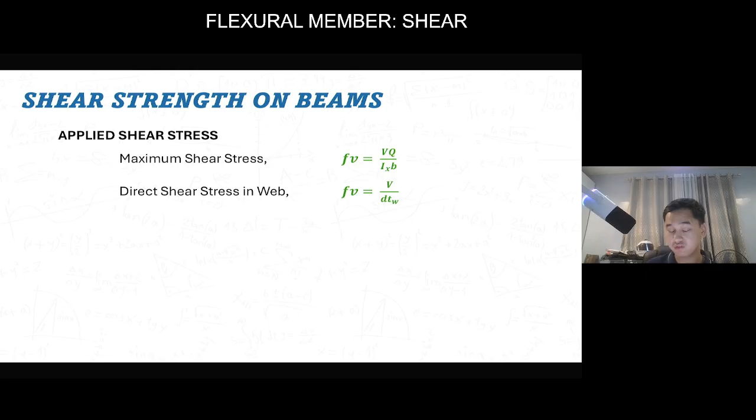This formula is commonly used for timber members, VQ over IB. The Q there, that's the only new part - that is the statical moment of area above the neutral axis. So that's the VQ.

For example, we have this. Okay, this is the neutral axis. What is the moment of area above, going up to here? So that's the Q, usually.

So, actually, this is also the horizontal shear stress. This formula is for the vertical shear stress. So what do we usually use here?

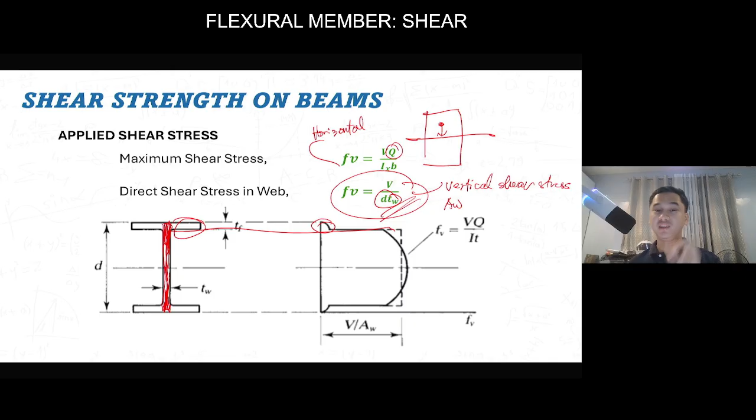So for direct shear stress, we apply the load directly on the shear area. What is the shear area here? DTW, okay, so we have that.

So for the AISC specification for shear, we have the design shear strength - this is familiar again - which is the reduction factor times Vn, and allowable shear strength Vn over omega shall be determined as follows. For LRFD, your design shear strength should be greater than the shear required by the factored loads, right?

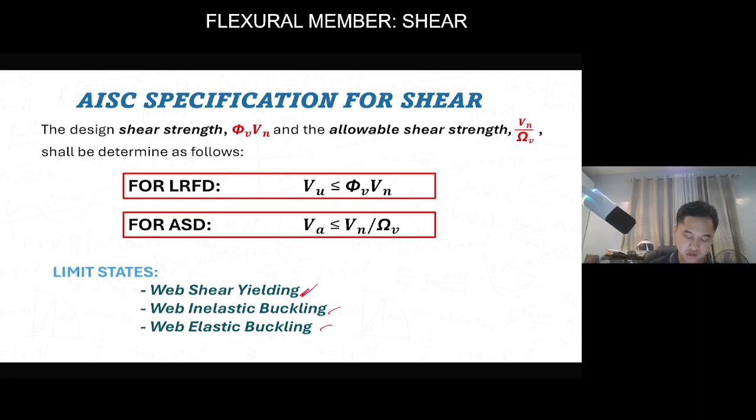So, nominal shear strength, Vn. How do we compute Vn? This is easy, unlike the one for bending. So for Vn, the nominal shear strength, we only have 0.6 Fy AW CV.

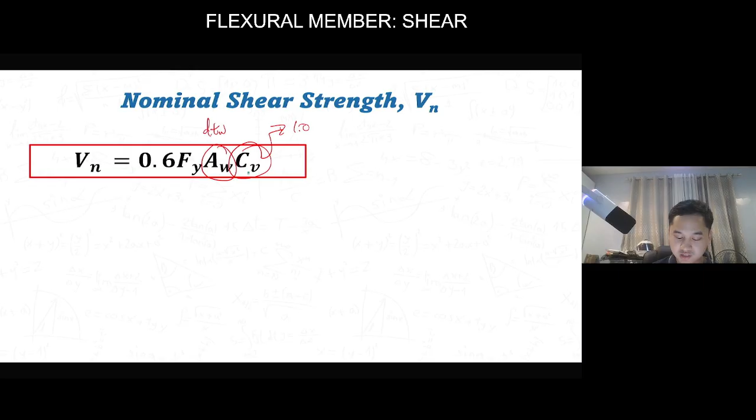Actually, it's easy, but this AW of ours is just DTW. What's this? That is the shear coefficient, which for hot rolled sections is usually 1. So it's easy, right?

That is the web shear coefficient, a modifier that accounts for the buckling behavior of the web. It is the ratio of critical web stress to shear yield stress. We have the AW, shear area of the web, that's just the DTW.

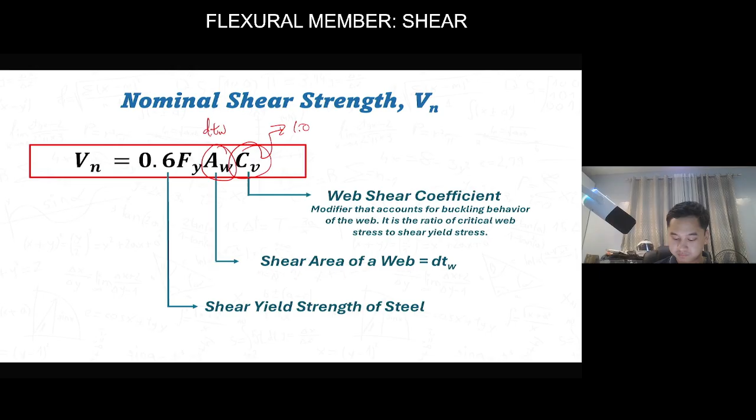And Fy, the 0.6 Fy, is the shear yield strength of the steel. So the shear yield strength of our steel - you know this already - if it's A36, that is 36 times 6.9, so you'll have the megapascal.

So now, what is CV? As I said earlier, usually that's 1, but it's not always like that. The value of CV depends on whether the limit state is web yielding, web inelastic buckling, or web elastic buckling - the value varies. For case 1, you should check for this. You don't have to memorize this because I will give this. And again, if it's hot rolled, I-shape, it's always just 1, right?

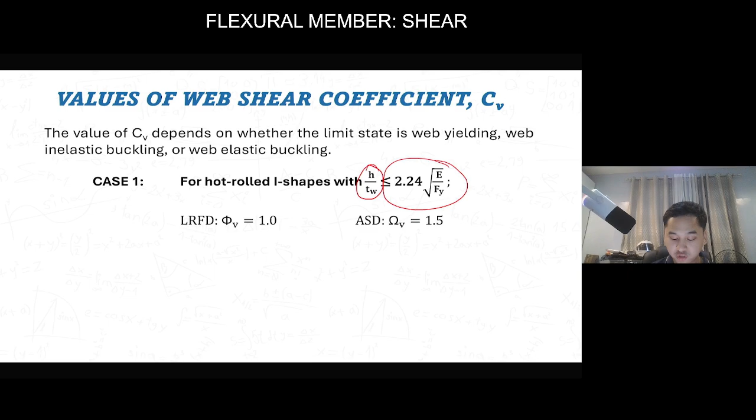So automatic yan pag hot rolled, lalo kung galing sa manual. Okay? Pero wala kang tiwala, you check this. You get this, then compare nyo dito. Pag nasatisfy nyo yan, therefore yung reduction factor nyo is 1, yung omega nyo naman, yung safety factor mo naman,

is 1.5. Okay? So yung H, ano nga ba itong H na to? H is the D minus 2K, di ba? Or minsan pag wala tayong K na value, di ba, pwede natin gawin yan, lalo kung composite, pwedeng D minus 2TF. So actually, this is also parang sa lambda lang natin, width thickness ratio.

So naiba lang tong coefficient na to. Alam niyo na rin yan. So tingnan nyo pag hot rolled yan, usually naman ang mga flexural member natin is mga hot rolled na member and I-shape. Usual yun. Pag ganun given, automatic. Ang reduction factor natin is 1 na.

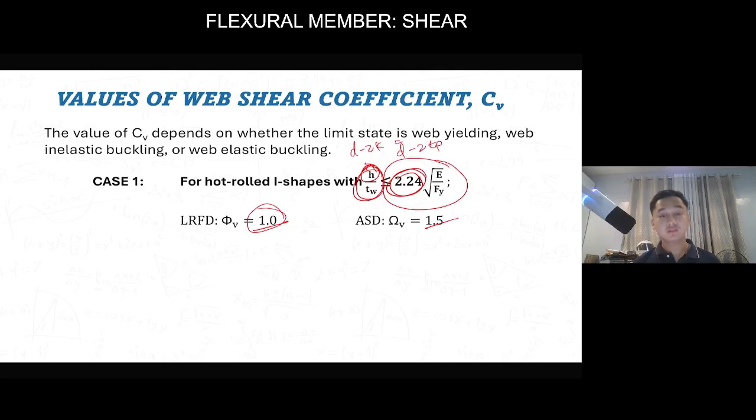Then our CV is given as follows. Wait, hindi binigay pala. Pero ang CV dito sa case 1 is 1.0 din. Okay? So pag hindi yan binigay, pwede nyo ito i-check. Pwede, pag nasatisfy yan, 1 lang yan. Paano sir, pag hindi ito nasatisfy?

For all other, na to, doubly and singly symmetric shapes. Kasi ito for I-shapes lang to. Para pag di nasatisfy yan, pupunta dito siya. Or kaya meron pa isa sa mamaya, sa kabila naman, 2.B. Okay? So pag dito, ang phi natin dito is 0.9, and omega is 1.67.

Pati yung 2.B, parehas lang. Pero dito kasi you have to check with this. Check mo to, kung compare mo dito. Ang naiba lang dito yung KV. Yung KV, ano yung KV? We'll discuss it in a while. Okay? So CV dito, 1 pa rin.

Pero sir, ano yung naiba dito? Kung ito pala nasatisfy niya, 1 lang din naman pala. Ano naiba? Ito lang yung 0.9, hindi na 1. Okay? Pero sabi ko nga, I-shape naman bibigay ko. So you can focus with this. Kasi iba, hindi na to binibigay sa undergrad.

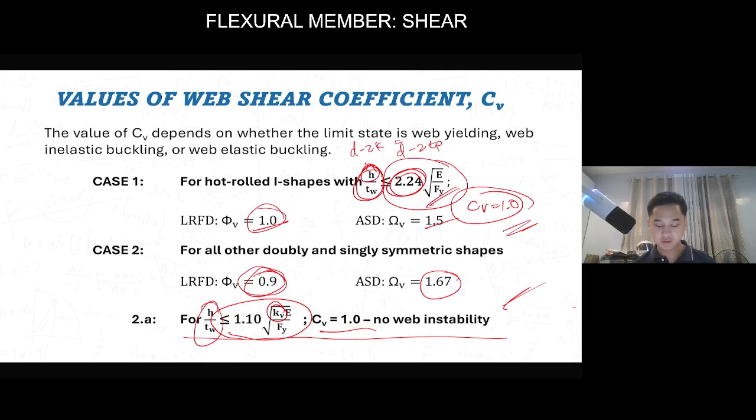Okay? So we also have the 2.B. Ayan. Pag hindi mo satisfy kanina, ito yun kanina, di ba? Pag nasa lesson siya dito, yung 2.A. Pag 2.B naman, nasa pagitan nito at ito. Okay? Ano ulit yung KV, sir? Wala pa tayong KV. Pag ito daw nasunod natin, we have inelastic web buckling.

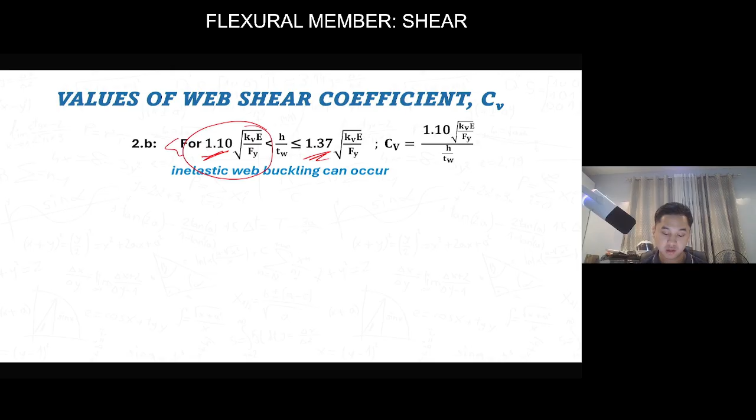Can occur, so we have inelastic web buckling. Ang CV natin is this. You have to compute it. Medyo mahirap. So again, nire-run through ko lang pero hindi naman ito ang bibigay sa inyo.

Okay, we have the C naman. Pag lumagpas ka na dito sa limit na to, ano na mangyayari? You have to solve for CV. Ito yung formula niya. Okay? Again, ang bago lang dyan is yung KV. Ano yung KV?

Okay, ito alam nyo na to. KV is the web plate buckling coefficient. Okay? So how do we compute that? We have the case 1. Para lang siya mahirap, di ba? Mahirap siya. Pag yung H over TW is less than 260, therefore the KV is 5. Except for the stem of T-shapes where KV is 1.2.

Okay, for the case 2 naman, we have the stiffened webs. Diba? Ito yung unang case 1 kasi unstiffened. Ito, case 2 is stiffened webs. Ano ba ibig sabihin stiffened nga pala? Okay, ano ba yung unstiffened na webs? Sige, paliwanagan natin yun, pero for now ito muna.

Sige, ang bago lang dito, we have to check for KV. Diba kasi kailangan malaman natin KV para ma-solve natin yung 2.C. Diba kasi sa 2.C may KV tayo. Hindi pala. 2.C, 2.B, saka 2.A din pala. Lahat yung may KV, di ba? So we have to solve for KV.

So yung KB natin, may tatlong case, may dalawang cases, unstiffened and stiffened. Pag unstiffened siya, you don't have to solve for KV, you have 5 and 1.2. Pag stiffened naman, you have 5 plus 5 over A over H square. Okay? So ano nga ba A na yan?

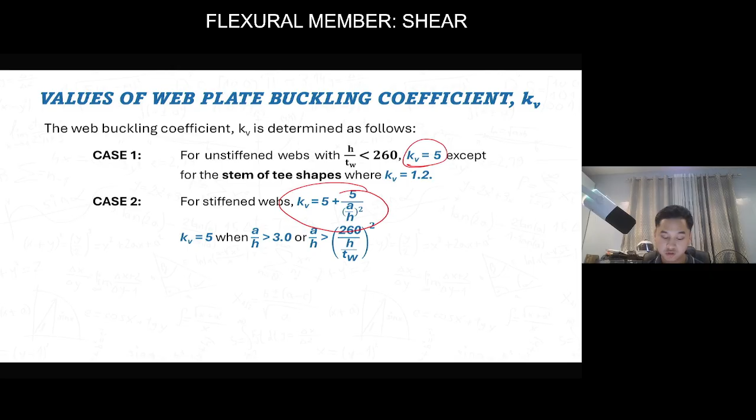So we have the formula din dito. You can use that naman. Pero ano yung A na yan? Okay, A is the clear distance between transverse stiffeners. So it is in millimeter. Ano nga ba yun muna?

So ano yung unstiffened and stiffened webs? Minsan kasi pag bumabagsak tayo sa shear, naglalagay tayo ng stiffener. Okay? So how do we do that? For example, we have the I shapes. Ayan, so imagine nyo na lang muna yan. Ayan, okay? So syempre pag bumabagsak tayo sa shear, ginagawa natin, naglalagay tayo dito ng stiffener.

Ayan, pero syempre dito rin sa kabila, meron din yan. Kasi dito, may naglalagay ako ulit, para may reinforce mo lang siya.

Yan, stiffener. Yan yung stiffened webs. Yung kabila naman, unstiffened, pag wala yan. Ngayon, ano yung pagitan yan? Center to center. Yung pagitan niyan, yan yung A. Ito yun. Ito yun. Okay?

So, if you encounter this, at least alam nyo na ngayon. Pero hindi naman yan ang bibigay ko again. I'm just giving a run through on this. But, of course, if you want to further your studies, then you may do so. Okay?

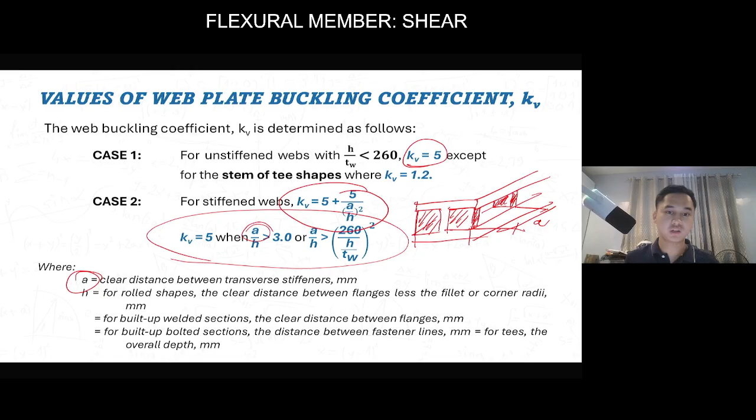So, let's start with sample problem. Madali lang to in comparison sa bending. Okay? Sample problem number 7. Check the adequacy of W30 by 116 for the beam against shear using LRFD lang.

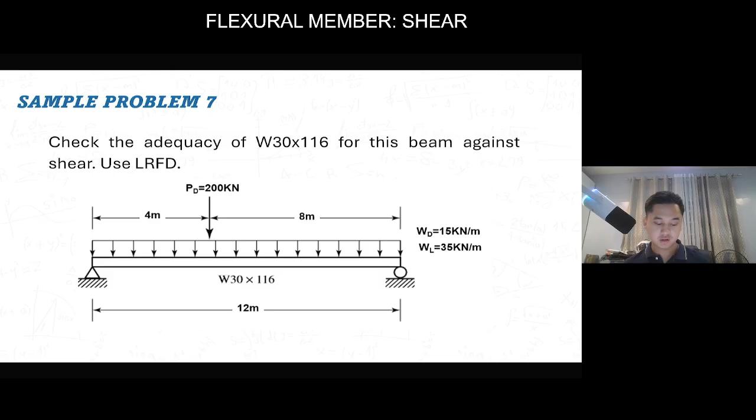We have the load, we have the 200 kilonewton. So, kunin natin yung VU. Ano yung VU natin dito? VU natin is 240 times 8 plus 74 times 12 times 6 divided by 12. So, parang nakuha yun. Solve natin.

Pero dapat, you should know this. You may take a moment here. Diba? Kung kumuha ng moment, let's say this is B. Okay? Summation moment at B is equal to 0. Gawin natin ganyan na. So, you have a shear here, with reaction here. So, of course, yung VU natin nandito. Bakit? Kasi malapit yung reaction, malapit yung load natin dito. Mas critical to. So, kung mas critical to, therefore, yan yung VU natin. Diba? So, go back with your statics.

So, if gagawin natin yan, we have VU, clockwise positive tayo, VU times 12, sorry. Okay, minus, eto, unfactored loads pa to. Gawin mo factor dyan, magiging 240 yan times 1.2. Diba? 1.2 dead load plus 1.6 live load, diba? So, ito, this would be 240 times, ilan to? 8.

Minus, ito naman, ano yung area niyan? Pag ito, kinuha mo yung factor loads nito, dati 74. So, we'll have 74 times, ano yung area niyan? 12 mo, para makuha mo yung span, mapaging point load siya, tapos kunin mo yung center niyan. So, we'll have 6. Okay? So, overall, sum equals 0, you'll have VU equals to, ito lang din yan.

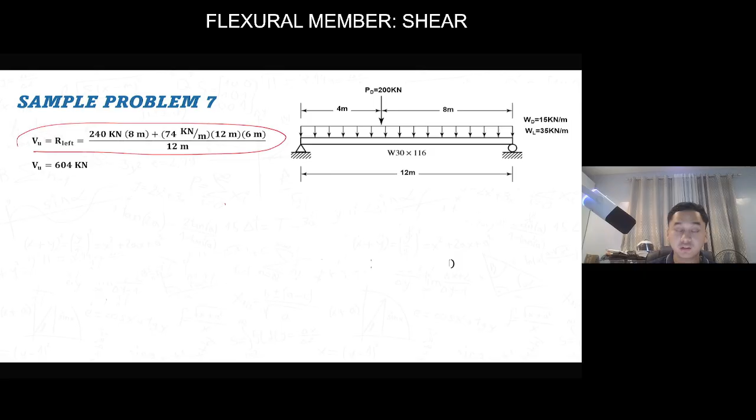So, itong 200 kasi na to, saka yung mga 15 na to, unfactored loads pa yan. So, you factor that, then ito lalabas dyan. Okay? Therefore, the VU is, but that is the least of our concern. VU is 604. So, yan yung VU natin. Yan yung load, required shear ng load. Diba? Required shear ng load.

Paano ngayon yung capacity? We have to check for the capacity. Paano man natin kinukuha yun? Una, alamin natin yung CV muna. Ano ba yung CV natin? You have CV, hot rolled to, di ba? So, dapat 1 na to. Pero if you want to check it, then check it.

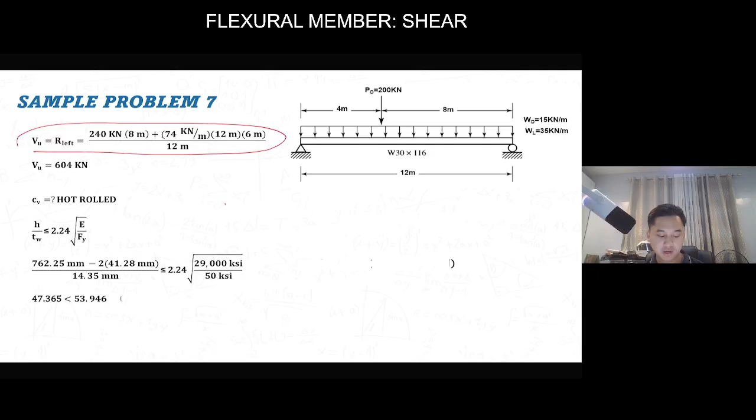H over TW, the width thickness ratio. Then, i-compare mo dyan sa 2.24, the square root of E over Fy. Ang lalabas dyan is eto. So, alam mo na kagad na case 1 siya. Kasi less than siya. Pero, again, you don't have to check this. Okay? Kasi pag hot roll, tapos galing sa manual, kung bigay sa manual, you don't have to check this. Alam nyo na dapat, ang case 1 I-shape na hot roll, dapat 1 yan. So, you'll have 1. And the reduction factor mo is also 1. So, you don't have to check that.

I just showed it parang makita nyo kung paano kung hindi siya ganun. Okay? So, VN natin is just 0.6 Fy. That's the shear yield strength ng bakal natin. And AW is the DTW. Then CV is the web shear coefficient. So, 0.6 Fy is 50. Kasi 50 KSI daw, yung grade 50 yung bakal natin. And 6.9 is the conversion factor para maging megapascal, di ba?

So, we have TW. Ito, galing to saan? Sa manual, you check that for the manual. This is D. This is TW. Then, CV natin is 1. So, we'll have V as 2,264.

Okay? Yung VU natin must be less than or equal to the design shear strength. Ano ba yung VU natin? 604. Ano ba yung design shear strength natin? We have the design reduction factor na 1. Then we have the VN as 2,264. Therefore, it is safe on shear. Kasi mas mababa siya. So, ganun lang.